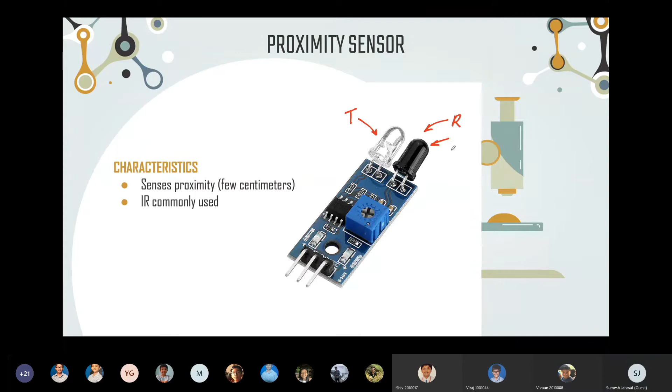Did I hear any other question? Yeah, I think I have another example. Nowadays we have this automatic hand sanitizer. So when you put your hand near it, it outputs the sanitizer. Is that an example as well? Yes, that is also an example of a proximity sensor, something that we use in our daily life.

So let's talk about the distance sensor now. The distance sensor is based on a similar principle as the proximity sensor, but its job is completely different. The distance sensor doesn't tell you that there is an obstacle in your proximity. It tells you the distance to the obstacle in front of you. And that distance can be farther away; it need not be just a few centimeters. For example, the sensors on the screen here, especially the one on the right, use ultrasonic waves, and can detect obstacles from about 5 centimeters to about 3 meters.

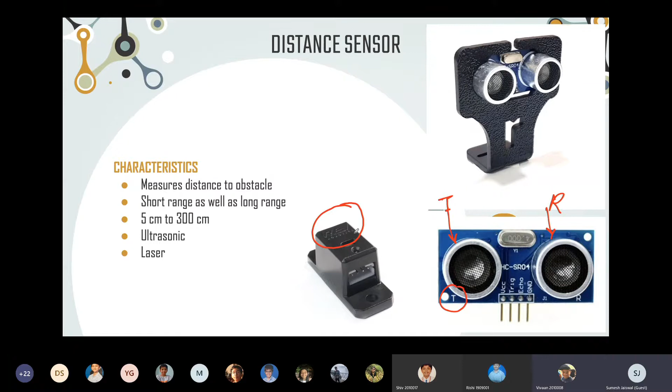So yes, theoretically a distance sensor can do everything that a proximity sensor can do, but depending on the practical limitations of the sensor, you may not be able to use a distance sensor in all places where you want a proximity sensor. Okay. So moving on, this third sensor is the light and color sensor.

Sometimes these are two separate sensors. You have one sensor for detecting light and the other for detecting color. The sensor for detecting light measures the intensity of light, and the sensor that measures color tells you what color of light it is.

In the REV Robotics kit, this particular sensor that you see here is a Rev light and color sensor. So this does both. It has both sensors inside it and will tell you not just the intensity of light, but the color of the light as well. Now what you see on the right here is the internals of this particular sensor.

The way this light and color sensor works is there is something called a photodiode in the center of the sensor. This particular item that you see here is a photodiode. A photodiode is sensitive to the light that falls on it. It is something called a photoreceptor cell, or if you compare it to a human, it is like the eye or the retina of the sensor, which is able to actually detect the light that is falling on it.

Now the problem with these light and color sensors is they are very sensitive to the lighting conditions. For example, if you're in a dim, dark room, you may not be able to figure out the exact color of the object because the overall lighting is very low. Or if you are in a very brightly lit room with a lot of light falling on the object, then that object may appear white because it will end up reflecting all of the light instead of appearing the actual color that it is.

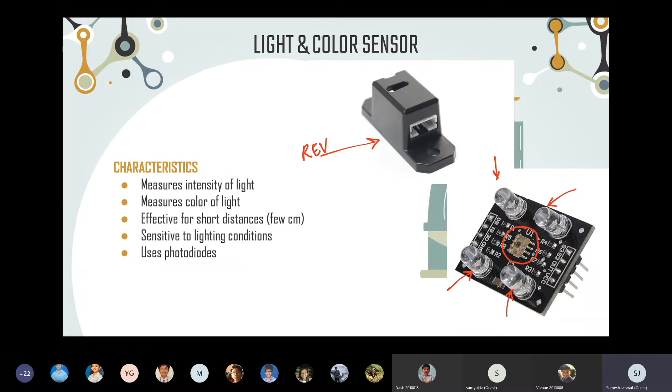So moving on, the next sensor is the sound sensor. A sound sensor again measures two things, intensity of the sound and frequency or wavelength of the sound. And a sound sensor typically consists of a microphone. What you see here, this black object, is the microphone. This microphone picks up audio signals. It measures both the intensity and the frequency, and based on this, you'll get a lot of information about the sound in your environment.

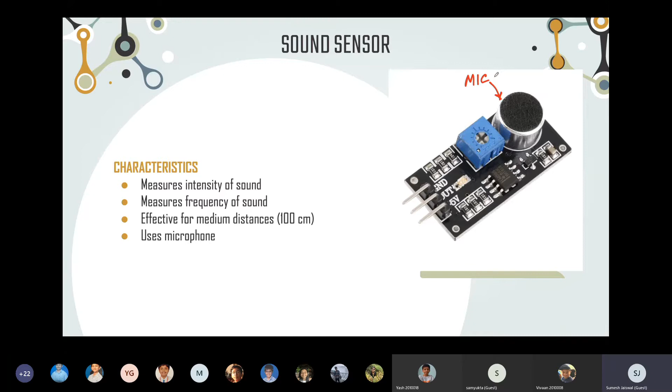For instance, if you have two musical instruments that operate on different frequencies, say a violin that emits a high frequency, high pitched sound, compared to a piano that will be lower frequency, you should be able to differentiate between these two instruments using this kind of sound sensor. Same goes for a male voice versus a female voice. Male voices typically have lower pitch, lower frequencies compared to female voices. So it's also possible to detect whether a man or a woman is speaking by measuring the frequency of the sound. So that's the sound sensor.

And finally, we have the touch sensor. As the name suggests, it detects touch. And when we say touch, this is not exactly the kind of touch we are all used to, for instance on a mobile phone screen or the trackpad of your laptop, because those kinds of touch are called capacitive touch. This particular touch sensor actually pushes a small switch, and based on that, it detects that the robot has touched something.

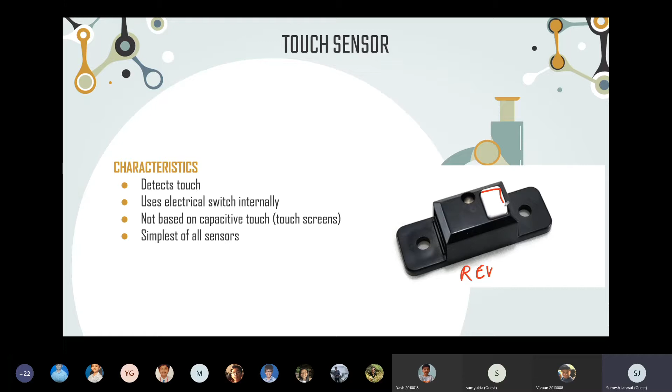This is again the Rev touch sensor, and this white piece you see here is an electrical switch. If you mount this Rev sensor in the front of your robot and this white switch gets pressed by some obstacle, that signal is sent to the hub, and the hub comes to know that an obstacle in front has touched the robot. Like I said, this is an electrical switch, not based on capacitive touch. And this is the simplest of all sensors, because it's just a simple switch that connects and disconnects the flow of current inside the sensor.

So these are the sensors that are commonly used in FTC. Now, besides all this, there is also a video camera that you can use in FTC.

So you're allowed to put one video camera on your bot, and you can connect it either to the control hub or to the Android device, the robot controller RC on your robot. And you can have appropriate programs written that can analyze the video feed that comes from that video camera. And based on that, you can take decisions.

For instance, if you remember in the first session, I showed you the Skystone, that was a yellow block on one side of which there was a black sticker. So these kind of objects can be detected using this video camera. So I'm not going to cover that as part of the sensors, even though it is actually a sensor. We will take a look at it when we do our programming, because that requires a lot of programming. It's not simple to use. So we will look at that in detail when we program our bot.

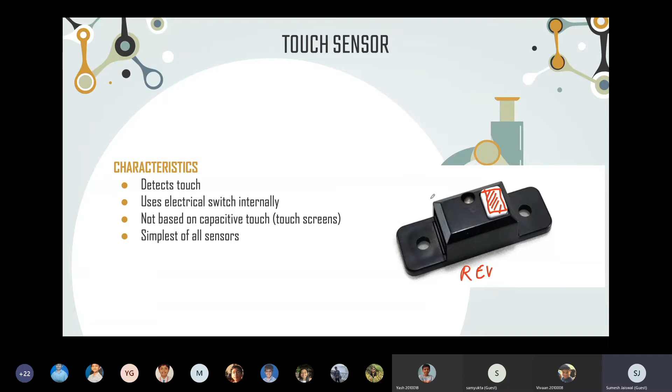Okay, so that brings us to the end of our sensors. If there is any question, I can take them now, or else we can proceed with the robot build. So when we build a robot, the first thing that we build is the wheelbase of a robot. So this is what... Sorry, is there a question?

Yes, I have a question. Why do people use both the distance sensors and proximity sensors when a proximity sensor can basically do whatever a distance sensor can and more? No, it's not that a proximity sensor can do everything that a distance sensor can. It's the other way around. A distance sensor can do everything that a proximity sensor can, but that is only theoretically.

When you actually put it on a bot practically, then at smaller distances, your distance sensor doesn't give you really reliable readings. And a proximity sensor gives you more reliable readings at shorter distances. That is why you use proximity sensors for that purpose. So it's more of a practical decision rather than a theoretical decision. As you build a robot, you'll realize that not all of what you learn in theory works exactly in real life. There are a lot of limitations and constraints that you need to get over, and you need to come up with various alternatives like these. If a distance sensor is not working, use a proximity sensor.

Sometimes we even use a light sensor if none of these two work, because a light sensor also tells you the color of the object in front of it. And if there is no object, it will probably tell you something like a gray color, which will probably be the color of your floor. And if that color changes from gray to something else, you can say that this is an obstacle. So that is another way of detecting an obstacle. Again, the purpose of that sensor is different, but you could use it for this purpose as well.

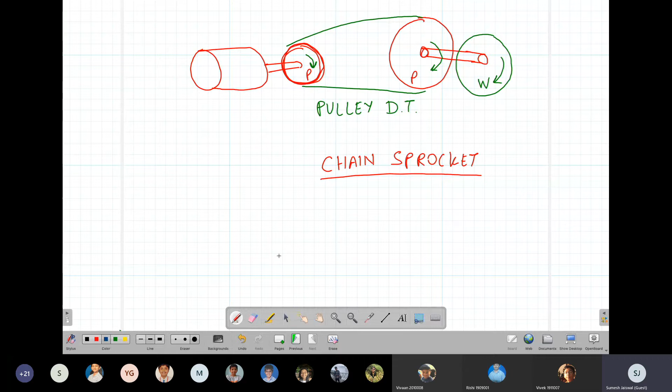So the fourth kind of drivetrain that we have is called a chain and sprocket drivetrain. This is what we have on a bicycle. So this looks something like this. You have a motor, you have a shaft coming out of it, and on the shaft you mount what is called a sprocket. A sprocket is similar to a gear. It also has teeth, but much bigger teeth like this. And those teeth are meant to go over a chain, not to mesh directly with another sprocket.

Then there would be another sprocket on which the wheel is connected, having a shaft on which you have a wheel. And finally, you have a chain that goes over these two sprockets. So this is what you have in a bicycle. In a bicycle, there are two places where chains and sprockets are used. When you're pedaling the bike, you're rotating a sprocket by your pedals. There's a big sprocket that you see.

And whatever you call gears in a bicycle actually shifts your chain from one sprocket to another sprocket. If you've seen how gears change on a bicycle, you will see the chain actually slipping from one sprocket to another. And by changing these sprockets on the fly, you're able to attain different speeds. So it's a chain and sprocket system on a bicycle, not a gear or a pulley. So in FTC, you have these four options.

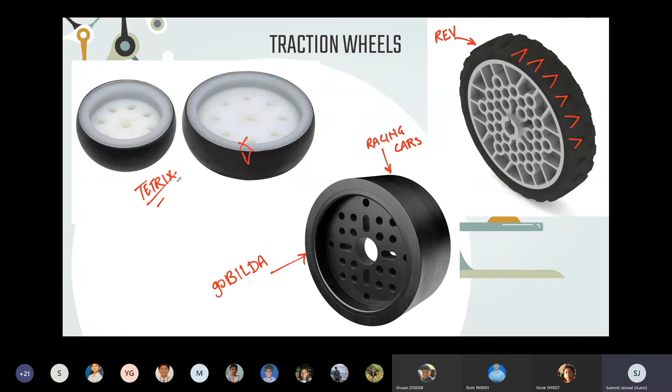And then these are Tetrix wheels that you see here on the left. These are similar to the REV wheels, except that they don't have those grooves. And they are a good combination of REV and goBILDA taken together. So these are the Tetrix wheels. So these are the traction wheels that you can use on your bot. The other kind of wheels that you can use are called omni wheels. So can anyone tell me what are omni wheels used for?

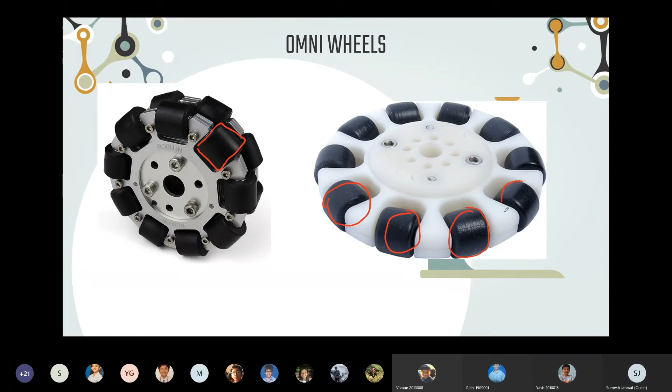So if you look at this omni wheel, you'll see that there are these small rollers all along the periphery of the wheel. These are present all along the wheel. This can be used for better turning. Yes, it is helpful in turning. So what these rollers allow you to do is sideways movement. So let me give an example. Suppose you're looking at your robot from the top, then your wheel will look something like this. And when the wheel rolls, this is the direction in which your robot will move.

When the wheel rotates in this direction, this is the center of the wheel. So the robot moves in this direction. Now, what if you want to move the robot in this particular direction? If you have a traction wheel, the traction wheel will not allow you to move the robot in this particular direction. It will give you a lot of friction. You'll have to literally drag the wheel over the foam or over the floor in order to make the robot move sideways like this.

These omni wheels allow you to do exactly that. They allow you to move sideways because they have these rollers on them. So what happens is when you try to move the robot sideways, these rollers start rotating and they reduce that sideways friction, and they allow the robot to move sideways. So that's the job of these omni wheels. Now, omni wheels are present in your REV Robotics kit as well, so you'll be using these.

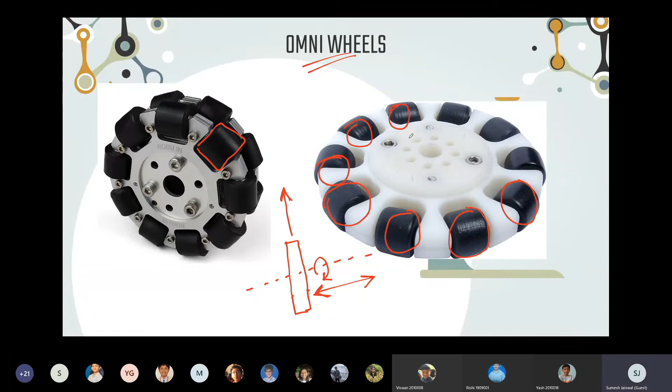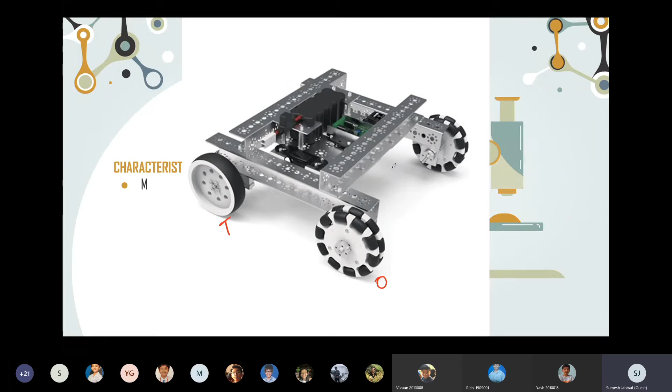This is an example of a wheelbase that has been made using 2 traction wheels and 2 omni wheels. These 2 are the omni wheels, and these 2 in the back are the traction wheels. So using a combination of these, you can build your wheelbase. We'll come to wheelbase designs a little later, where we'll see how you combine these wheels with each other and what advantages you get by it. So if you have questions around that, just hold on till that comes up.

And the third category of wheels are called mecanum wheels. Mecanum wheels are a kind of omni wheels, but they're much more advanced in nature. And they not only allow your robot to move sideways. So if this is your robot, and this is the front, the forward direction, omni wheels will only allow you to move in this direction. Mecanum wheels will allow you to move in any direction, and you have very good control over the direction in which the mecanum wheels take your robot.

So these mecanum wheels are a modification of the omni wheels, but they're much more advanced in nature. If you want to have real flexibility in your robot, then you use mecanum wheels. Again, these are used by advanced teams. Beginner teams usually do not use mecanum wheels. Yeah, go ahead. So then why would people use omni wheels? We'll come to that when we talk about the wheelbase designs. All right, so hold your question till then.

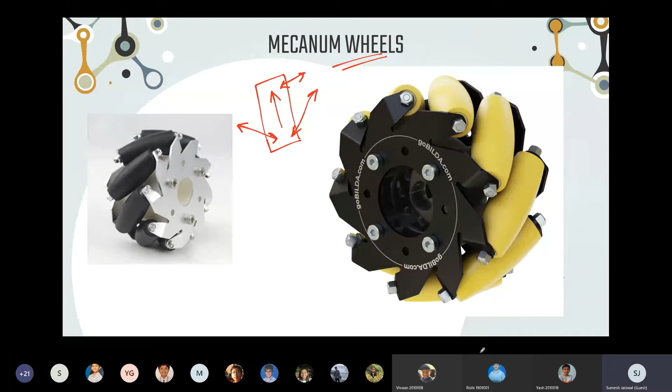This is an example of a wheelbase that is using mecanum wheels. You can see there are 4 mecanum wheels being used here, and these wheels are arranged in a certain pattern. As we see here, the rollers of this particular wheel are in this direction, rollers are in this direction, and these rollers are like this. So there is a certain pattern that needs to be followed when you use mecanum wheels on your wheelbase. We'll talk more about the mecanum wheelbase a little later.

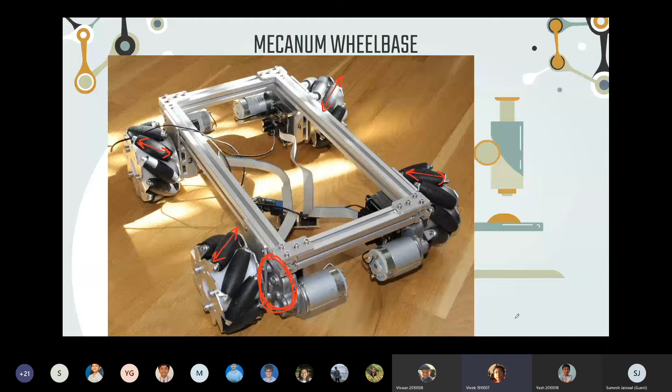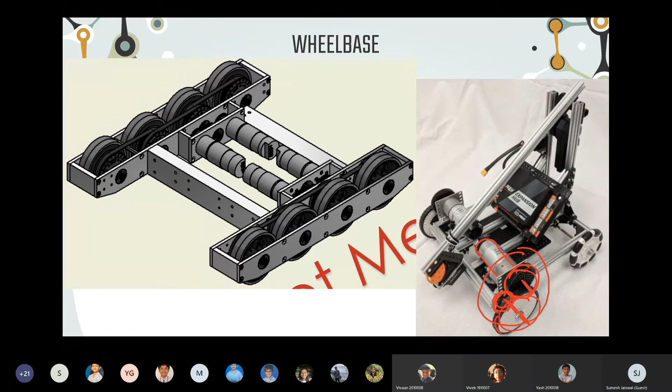So, yes. In that photo you were showing a while earlier, where you were explaining the gears, that uses 2 traction wheels and 2 omni wheels, right? Right. Okay. So why we do that, we'll come to that in a little while.

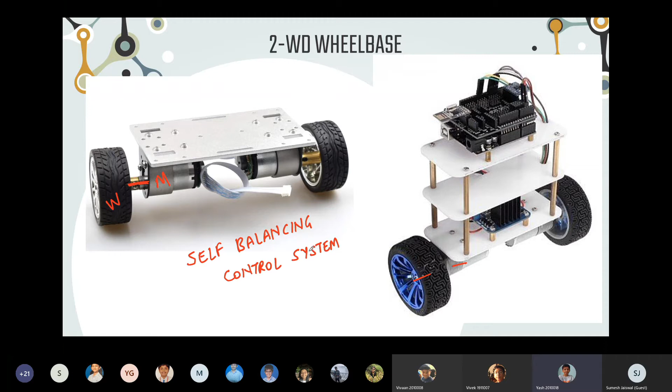So in order to make it stand on 2 wheels, you need to do extremely complicated programming here. And you need to build something called a self-balancing control system. So can someone tell me how come a human is able to stand on 2 feet when it is so complex? Because we have a symmetric body and the center of gravity is exactly in the center. So even these robots that you see here, they also have a symmetric body. Their center of gravity is also more or less in the center. But still, they require a self-balancing control system, which is extremely complicated.

So friction? Not really. See, suppose you're standing on the ground and you start tilting towards one direction, then your body is able to automatically correct itself. Something called a closed feedback loop. So inertia? No, not really. So the human being also has a self-balancing control system built inside it. And that control system is inside your brain. So a human is actually a 2-wheel drive wheelbase. It's not wheels, actually, it's legs. So that's why a human is called a biped. Biped means 2 legs. And inside the brain, there is a self-balancing control system.

And inside the human ear, there is a sensor that tells you the orientation of your body. And using that sensor's inputs, the human body is able to figure out whether it is tilting to one side or not. And if the body is tilting to one side, then all the muscles of the body act accordingly to straighten the body again. And this happens continuously, without our conscious knowledge. All this happens subconsciously. The brain does it on its own without telling us. And we have been doing it since our birth, so we have gotten so used to it that we don't realize that we are doing it every moment.

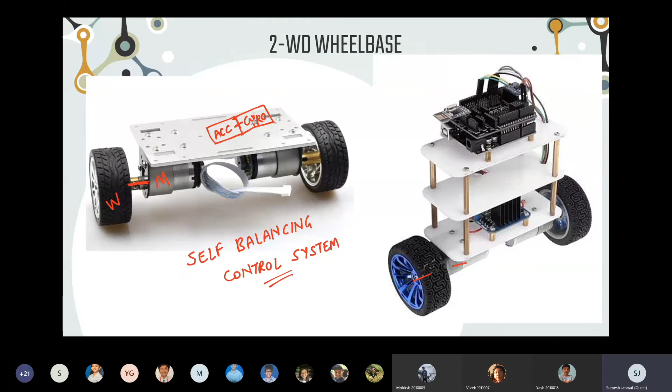So in order to do something like that here, in this kind of a wheelbase, you need to have a special sensor called an accelerometer. Plus, you need something called a gyroscope. So you need these two sensors in order to be able to understand that your bot is actually tilting and it may fall, so that the wheels can move accordingly and straighten it again. So these kinds of sensors are used in this kind of wheelbases. Now for FTC, this becomes a little bit too complex. So no team uses two-wheel drive in FTC.

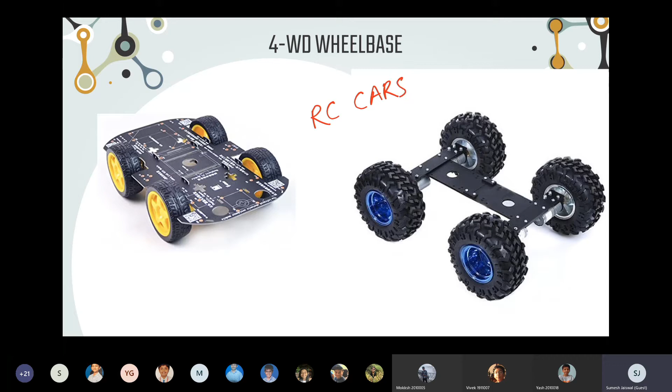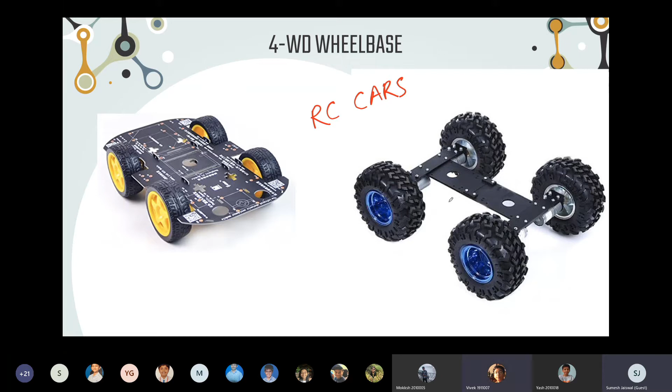Now these kinds of wheelbases are not very precise in their movement. They have a lot of speed, but if you want to do very precise navigation with this, since these wheels are all traction wheels, it's not able to do that kind of navigation because there is absolutely no sideways movement possible using this kind of a wheelbase. So this is also something that most teams do not use in FTC, but there are some teams that even go for this as well.

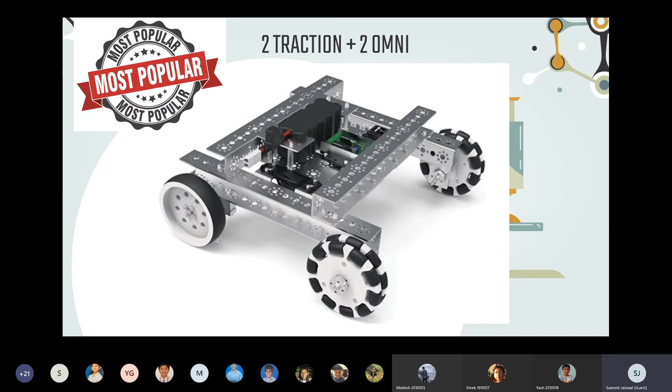Now this is a two traction wheel plus two omni wheelbase. This is again a four-wheel drive wheelbase with two traction wheels and two omni wheels. These are traction wheels, and these are the omni wheels, and there's a fourth traction wheel in the back that you cannot see. This is the most popular wheelbase that is used in FTC, and most likely you would end up building this

kind of a wheelbase. The advantage of this wheelbase is it gives you high traction because there are two traction wheels that are connected to two motors. So in this particular kind of a wheelbase, you have motors connected to the two traction wheels here and here, and your omni wheels are free to rotate. They don't have any motor in them. They are just mounted on a shaft. They are free to rotate anywhere they want to rotate.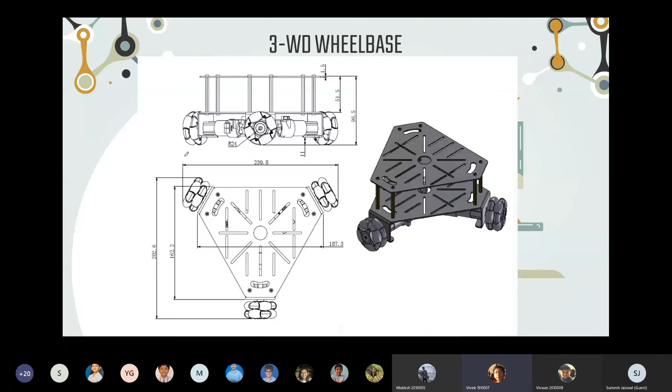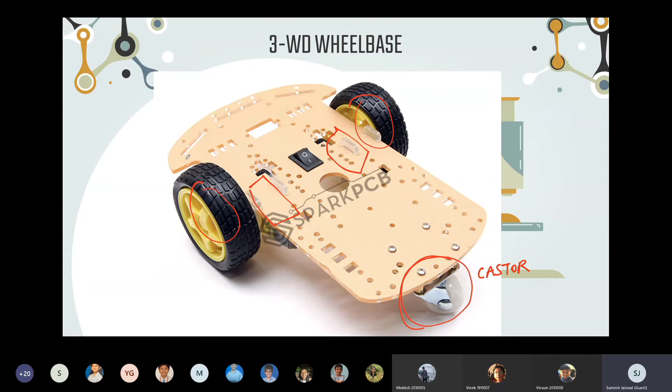Okay. So I have a question regarding the 2WD wheelbase, I mean sorry, the 3WD wheelbase. Is that system called closed feedback loop? No, not really. We'll come to closed feedback loop when we talk about autonomous programming, but this has no connection to any kind of feedback loop. Okay, thank you. We'll come to that when we talk about programming.

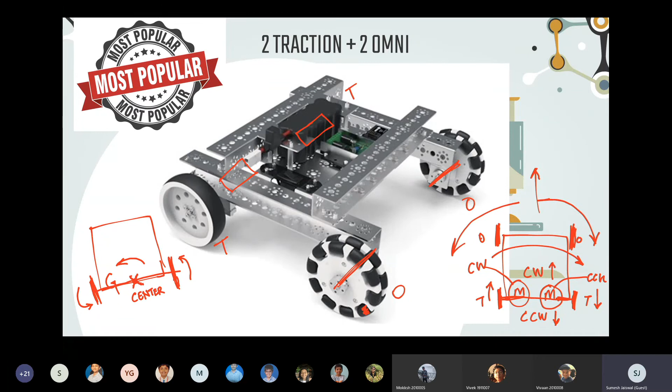Now the advantage of this approach is you're actually powering up all the four wheels. So what you get is a true four-wheel drive, and sometimes, depending on what is there on the ground, there might be some obstacles, and if you end up stepping on those obstacles, maybe one of your wheels will end up in the air. It will not be making contact with the ground for a little while.

And if that wheel happens to be a traction wheel, and if the motor is connected to that wheel, then that motor will simply be running, and your robot will not be able to take advantage of that particular wheel. So that is why this particular design has connected both the omni wheel and the traction wheel to the same motor.

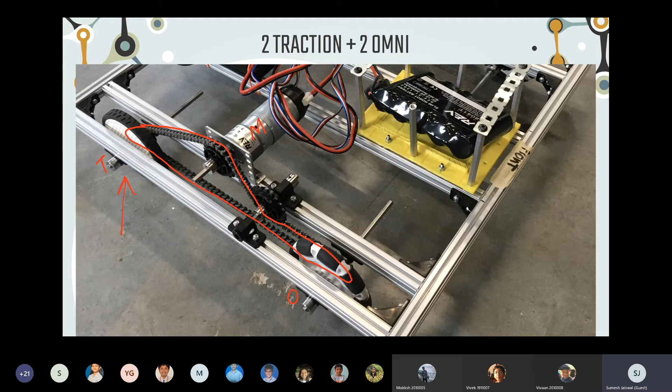So this is the next design that you can try. Once you've tried out this most popular design, this is the next design, where you power both the omni wheel and the traction wheel using some kind of a drivetrain. Here the drivetrain is your chain and sprocket. You could also use gears here if you want to. Now pulleys, I would not suggest you use pulleys. Like I said, the belt becomes loose after a little while and then starts slipping. So pulleys are not really suggested.

In terms of comparison between gears and sprockets, I would prefer sprockets because sprockets interlock very well with the chain. Gears have very small teeth, and it's very easy for those teeth to go out of interlock with each other. So they may not be locking anymore. If your robot gets banged against another robot, your gears may get disturbed a little bit, and then your gears will not be in mesh with each other, and your drivetrain will stop transmitting power.

So in terms of comparing these various approaches that we saw, the simplest is the direct drive, and the best in terms of being resilient to bumping and damaging of the robot and having a long life is your chain and sprocket. So you should start with a direct drive and progress to a chain and sprocket drive.

So any questions at this point? No.

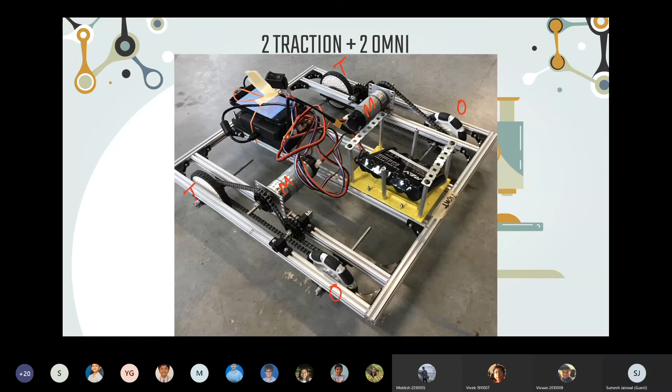The advantage of this is you can make this particular wheelbase move in any direction. You can make it move in this direction or in this direction. In any direction, you can make it move. And before I explain it further, let me show you a small video that will make it all very clear. So if you have any questions, they'll all get answered by this video.

So as you can see, the wheelbase is moving in all kinds of directions. So your robot is not turning. See, make a note of it. Your robot has never turned even a little bit, but your wheelbase is able to move in 4 directions. So this is the 3rd direction in which it's able to move, and then they'll show the 4th as well.

So in this particular mode, you will see only 2 wheels are rotating. The other 2 wheels are not rotating. They're stationary. But since they have rollers on them, they do not provide any friction. So this is how this 4 Omni wheel drive works.

So in principle, it looks fantastic. And since it has the capability to move in almost all directions, it seems to solve a lot of our problems which occur in our regular 4-wheel drives. But the big problem in these 4 Omni wheel drives is the robot is very unpredictable. The robot is not predictable at all, and it's very hard to control it.

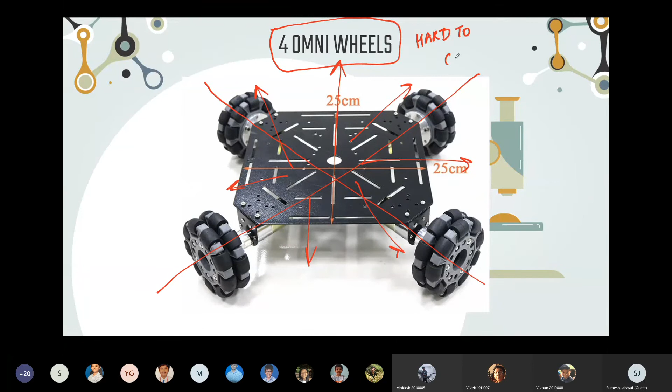So when you are trying to control this kind of a bot with a gamepad and a match is going on, you'll not be able to precisely control the direction in which your bot is going, and the bot starts moving like crazy. Which is why, even though a few FTC teams end up using this, none of the serious teams use this kind of a configuration. So this is how the 4 Omni wheelbase works.

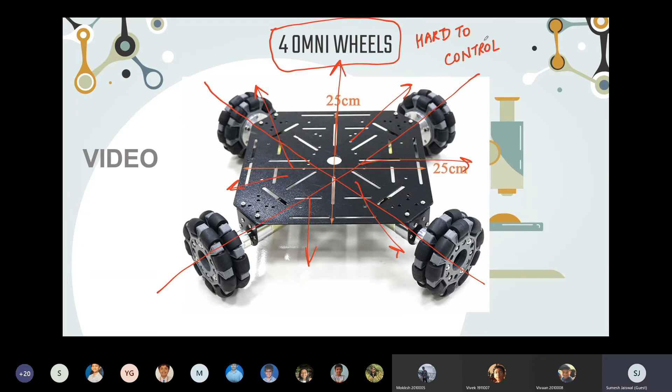Can someone give me examples of where this kind of a wheelbase is used? Trucks? No, not really. So trucks do have 6 wheels, but the reason why trucks have 6 wheels is because they need more traction on the ground, because trucks are extremely heavy. Sir, which wheels are these? So these are traction wheels.

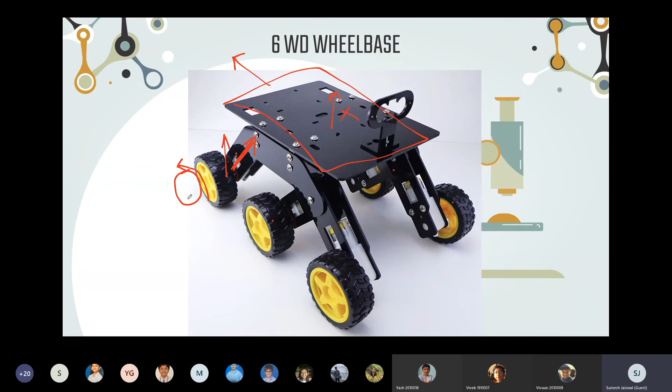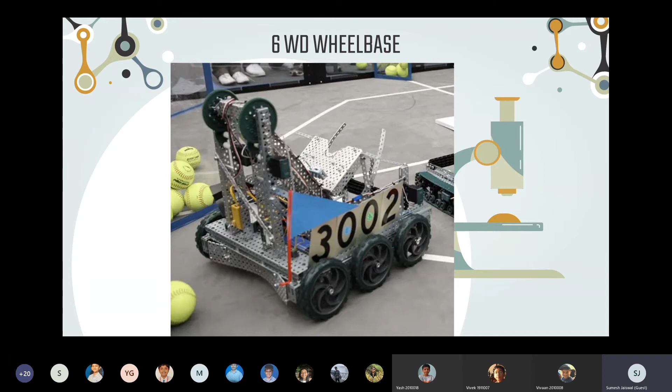This is another picture of an FTC robot that uses a 6-wheel drive. All wheels are traction wheels. So this robot would have a hard time turning. But for some reason, this team decided to go ahead and use this particular kind of wheelbase, probably because they wanted a lot of traction. So this kind of a wheelbase gives you a lot of traction as well, because of the larger number of traction wheels.

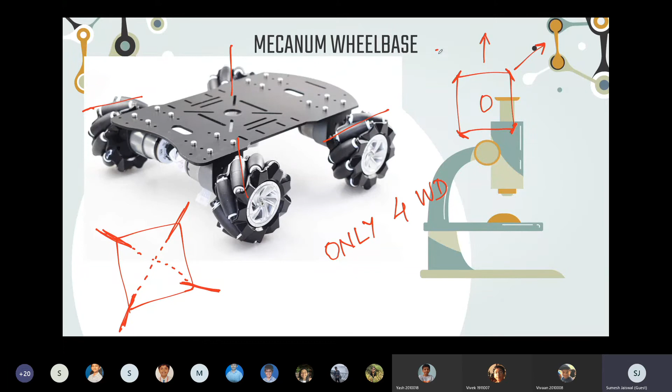This is the configuration in which mecanum wheelbases have to be built. And since this is the only configuration that works, you cannot have more than 4 wheels or less than 4 wheels. Now, the big advantage of a mecanum wheelbase: if you remember, you saw the 4-wheel Omni wheelbase. So there are 4 Omni wheels here, here, here, and here. And this wheelbase was able to go in these directions: 1, 2, 3, 4, and similarly 4 on the other side. So the 4-wheel Omni wheelbase can go in 8 directions.

On the other hand, a mecanum wheelbase can go in any direction. This is a mecanum wheelbase. You have mecanum wheels here. This can not only go at 90 degrees or sideways or at 45 degrees. It can even go at 30 degrees. It can go at 37 degrees. It can go at 120 degrees. It can go in any angle that you want. That is a big advantage of mecanum wheels over Omni wheels.

So the answer to the question that someone asked, why do we need Omni wheels when you have mecanum wheels, is because mecanum wheels are extremely hard to program. You need to be a really good programmer if you want to program mecanum wheels. That is the reason most beginner teams do not use mecanum wheels. They use only Omni wheels. Omni wheels are very easy to program.

But once you have reached a certain stage and your team has matured, you have spent a few years building robots, then you would want to move to a mecanum wheelbase and you would want to learn how to program these. So that's the difference between a mecanum wheelbase and an Omni wheelbase.

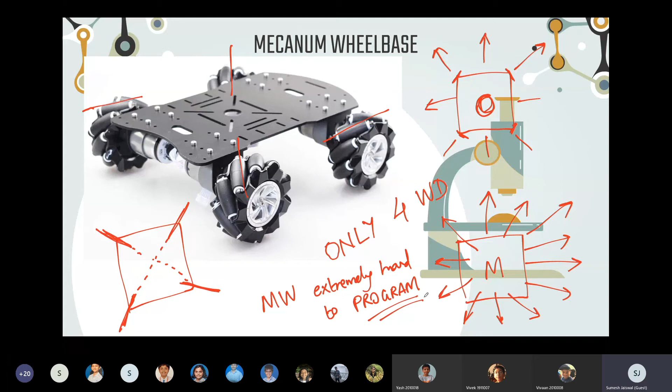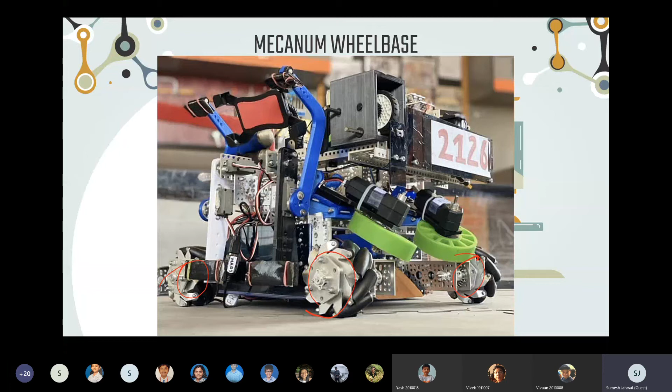So these are some pictures of the mecanum wheelbase in action. This is an FTC robot. As you can see, there are these 4 mecanum wheels, 1, 2, 3, and the 4th one is behind, you can't see it. And this is a pretty heavy robot. This is a robot built by one of my teams, and in terms of weight, it almost reached the weight limit of FTC. It's such a heavy robot. And the mecanum wheels allow this heavy robot to move in any direction. That's the big advantage of this.

Okay, so this was all about how we go ahead and build wheelbases. Now, all you learned today was theoretical examples of the types of wheels, types of drivetrains, types of wheelbases, and so on. Now, the exercise that you need to do is actually get your hands dirty and build a real wheelbase. And for that, you'll need a kit. So as soon as your kit arrives, I would like all of you to do 2 exercises. And these are those exercises.

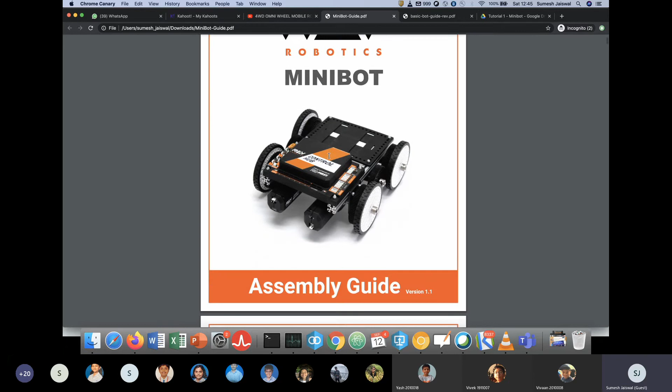So there is something called tutorial 1 minibot. If you go in this particular folder, there are some videos here, the minibot videos, and there is a PDF guide on how to build the minibot. So that PDF guide looks something like this. This is by REV Robotics, and what you would be doing is building a small robot that looks like this, with 4 traction wheels and a geared wheel drive and 4 DC motors and the control hub.

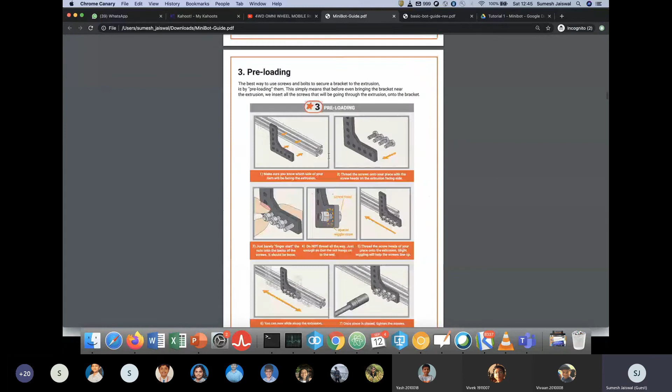So you'll be building something like this. So this is an assembly guide for doing that. It's a very detailed guide. It tells you what all parts you need, what all tools you need, and how do you go about it. Step by step, everything is explained.

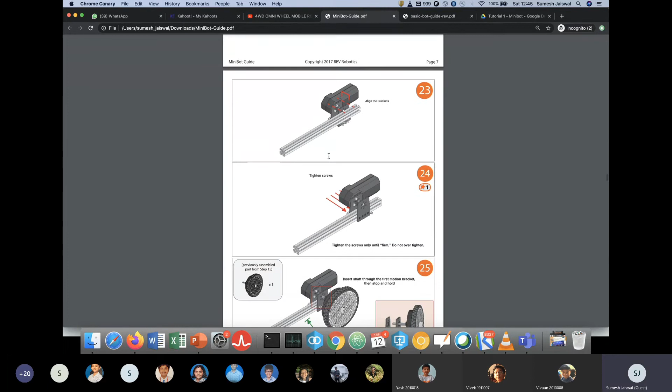So this is the first exercise that you should be doing. Build this kind of robot that will set you up for building more complex robots. So I would like all of you to do this exercise as soon as you get your kit. And once you're done with this, there is another guide over there called Basic Bot Guide. So this builds a little bit more complicated robot. So once you're done with the mini bot, you should build this basic bot.

And once you're done with both of these two, then you would be ready to build the bot that would play the game for this season. So these are the 2 exercises I would like you to do, and they're all available here on this Google Drive that I shared. And these presentations that I'm showing you in all these sessions, those also I have shared over here. Plus, there is a document on various FTC resources.

So that document is also present here, and you can refer to that document if you want to look at any more information. So I put a lot of links in that document. So take a screenshot of this, and this will give you all the information that you need for the next couple of months at least to get started on building the robot. All right. Any questions until this point before we begin our knowledge game?

Sir? Yes. Sir, so do we have to buy the kits on our own, or will the school be providing? Because we have a team. So Meenal, what is the plan? Can you answer this question? Okay, looks like Meenal is not here, but I think it will be provided from your school as far as I know. But you should check with Meenal ma'am. She will be able to give you the exact information.

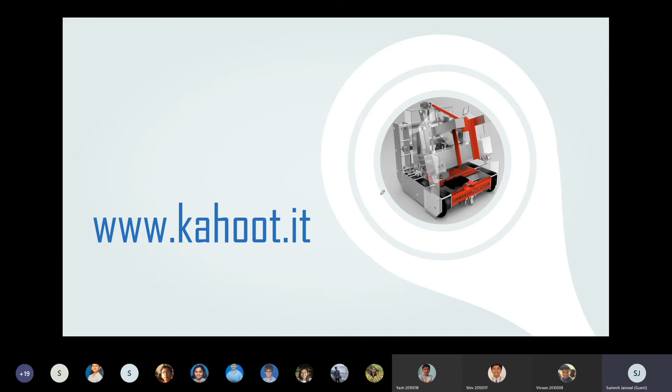And if you have a separate device, a second device with you, then I would suggest that you play this game on that second device rather than on the device on which you're watching this presentation. The reason is because the questions would be shown on my screen, and you can answer those questions on your other device. So if you have 2 devices, bring a second device and start using it. If you have only 1 device, then you can still use it. You'll just have to keep switching between your browser with this website and this presentation.

All right, so has everyone taken a note of this? I'll move over to Kahoot and we'll start the game. So what is the password that we have to enter? Yes, this is the pin: 6903434. So after you've joined, make sure your name is visible on the screen here.

Okay, we'll start now. Is anyone in the process of joining and not joined yet? Let me know. So I'll wait for a few more seconds. Otherwise, we'll get started. Okay, so looks like we have 20 people playing the game. We'll start now. So the way this game progresses is you'll get a question on the screen and you have to answer the question by choosing the correct answer on your mobile device.